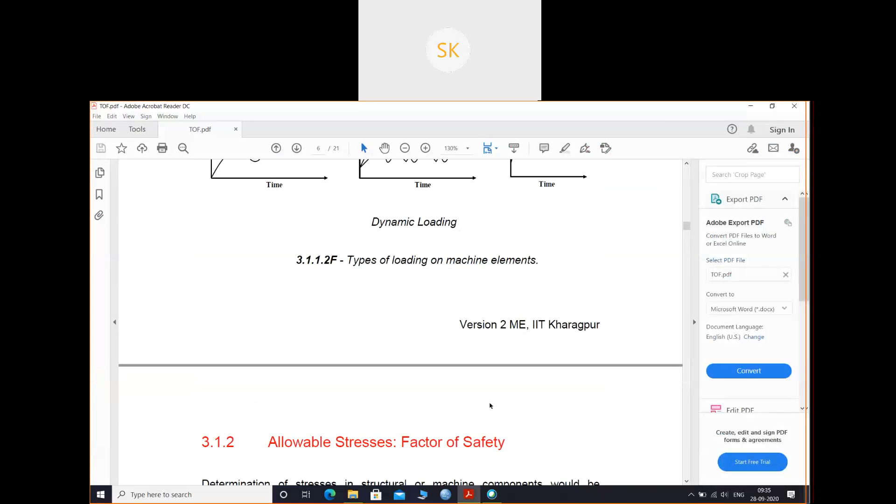So today we'll discuss theories of failure. This has two words: theories plus failure. Everyone has their own meaning of failure. If you relate it to personal life or day to day life, everyone has their own definition of failure. In terms of general things, in machines or in structures, we say a structure has failed when it breaks. So there will be two criteria for failure.

One will be yielding. When the structure yields, it tends to deform, then it gets failure. And there will be one more word, fracture. At fracture, your structure has deformed and it breaks. So this is one definition of failure.

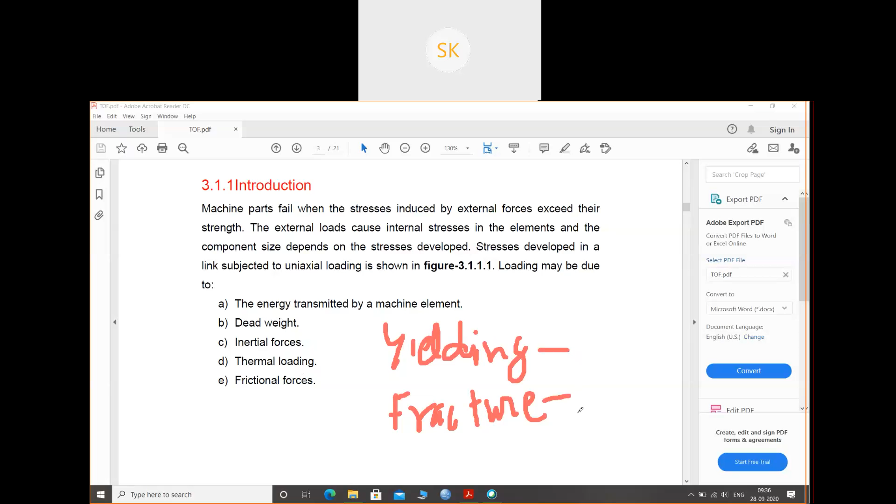So machine parts will fail when the stresses induced by external forces exceed their strength. I have discussed from the start of the class that a structure will be able to take a certain load or certain stress. When we apply a load, it will be able to take a certain amount of stress. After that, it will break, right?

So we have to design the structure in such a way that there will be two stresses. One will be allowable stress, or you can say... my voice is breaking, okay.

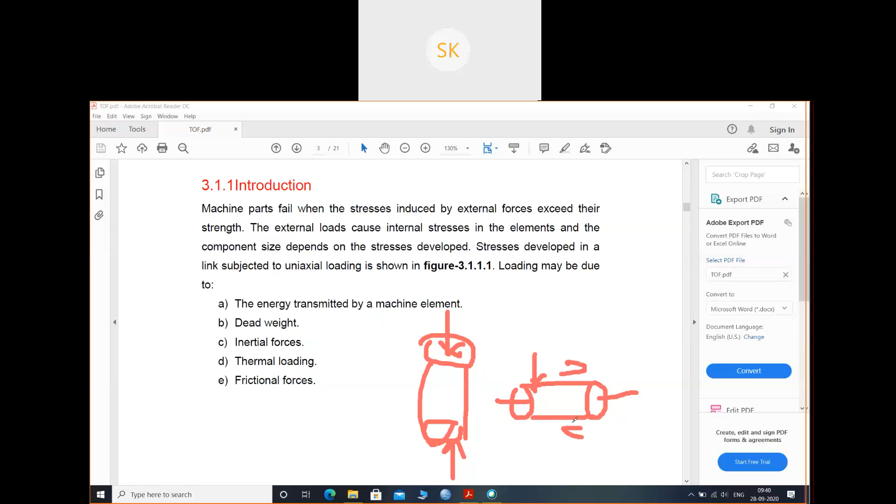This is tension, right? So uniaxial means stress only in one direction. But in general, in day to day life, a structure or machine or any component won't get only uniaxial stress, it will get many stresses from different directions, and from shear it will experience some shear stresses. But we cannot easily find the stresses on this complex body, so what we do is find the stresses treating the body as uniaxial. We relate this stress with the complex structure. The energy transmitted by a machine involves different forces acting on structures.

Before going to theory of failure, I'm starting with the basics. So this is one structure. Stress develops in a link subjected to uniaxial loading, it experiences tension, and these are the internal forces. These arrows are showing the internal forces on the member.

In another way, load may be classified as static load. Load that does not change in magnitude and direction, and normally increases gradually to a steady value. So sometimes you have static load, sometimes dynamic load. Static load means you can consider your dead load, the self weight of the structure, that is considered under static load.

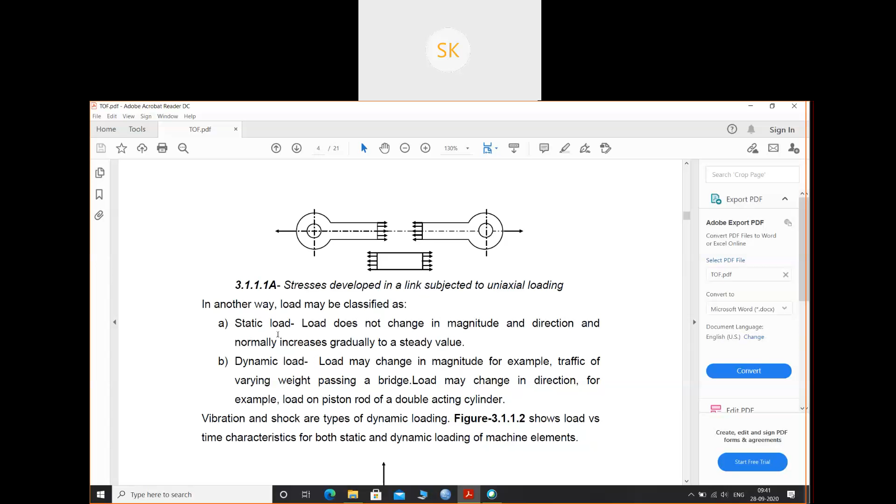Dynamic load is when load may change in magnitude, for example traffic of varying weight. Suppose you can also consider earthquake as dynamic load, or the moving of vehicles over a road, those are dynamic loads. The load is continuously changing, but in static load, the load will be similar in magnitude.

Now there is a very important point, factor of safety. You will get this word whole your life, factor of safety. Determination of stresses in structural and machine components would be meaningless unless they are compared with the material strength.

If the induced stress is less than or equal to the limiting material strength, then the design component may be considered safe. That means with the load we are giving, the stress generated from that load, if less than or equal to the limiting material strength, our component is said to be safe, and an indication about the size of the component is obtained.

The strength of various materials for engineering application is determined in the laboratory with standard specimens. For example, for tension and compression test, a round rod of specified dimension is used in a tensile test machine where load is applied until fracture occurs. This test is usually carried out in a universal testing machine, which maybe your earlier teacher in solid mechanics has already told you about.

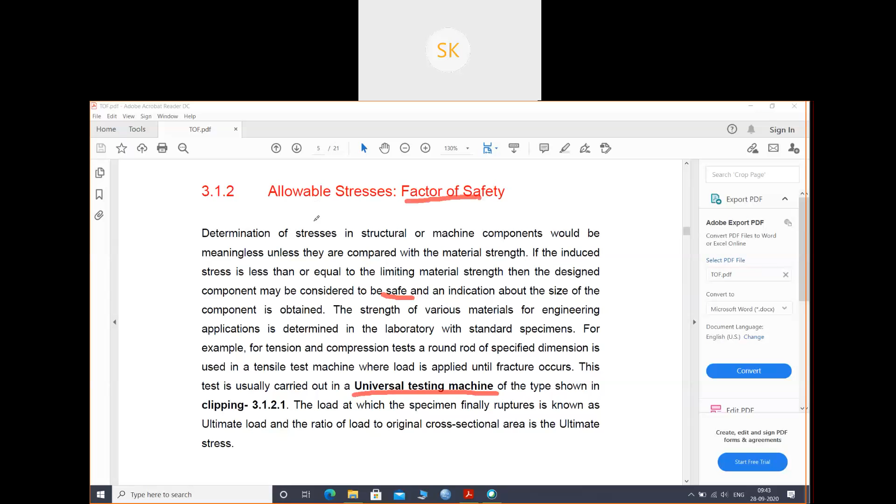That means we have to relate our material strength with the stress, and this stress should always be less than the capacity of the element. Whatever load we apply, the stress generated by that load should always be less than the material strength, that is, the load it can carry. We should not exceed this load or stress compared to the material strength, otherwise it will definitely fail.

So go through YouTube videos, you'll get a lot of videos about universal testing machines. What we do is insert a rod into the machine and try to pull it out, and at some point it gets fractured. The load at which the specimen finally ruptures or fractures is known as the ultimate load.

So as we continuously apply load, it will get yield. Suppose this is the rod, and this is the machine on one end - the machine will try to pull this rod in this direction. At some point it will fracture. So the load shown by the machine at which it gets fractured is known as the ultimate load.

That means this is the load it can carry - after this, it will fail. So the load at which your structure gets fails, that will be your ultimate load. The load at which the specimen finally ruptures is known as the ultimate load.

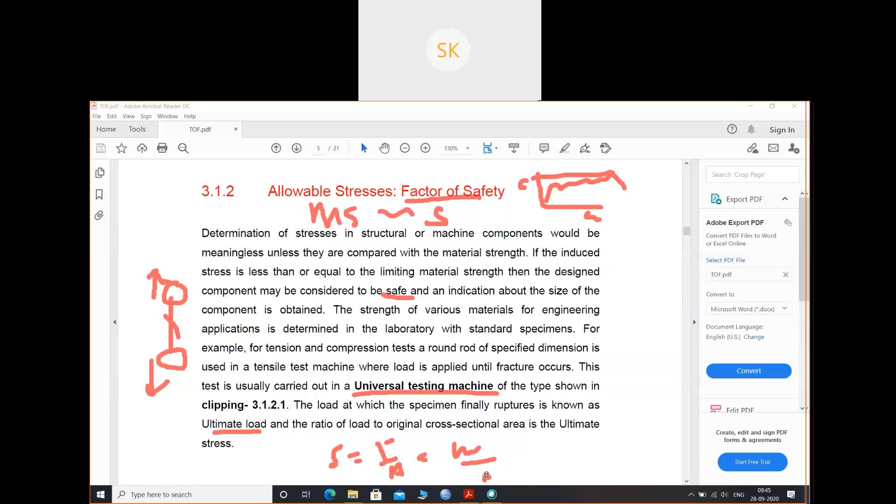And we discussed from the stress strain graph, right? We discussed from the graph that here it was the ultimate stress - this was the strain, this was the stress. So this final point of the curve is your ultimate stress. The specimen at which the structure or material finally ruptures is known as ultimate load, and that load divided by its cross sectional area gives you ultimate stress.

Similar tests are carried out for bending, shear and torsion, and the results for different materials are available in handbooks. For design purpose, an allowable stress is used in place of critical stress. So allowable stress means we can allow that much stress only. After that we cannot allow.

We will design the structure based on, we'll design the structure that at ultimate load it can carry, but normally we go for allowable stress, in place of critical stress, to take into account the uncertainty, including the following: uncertainty in loading, inhomogeneity of material, various material behavior, corrosion, plastic flow creep. Because of all these reasons, we used to take the allowable stress in our design purposes.

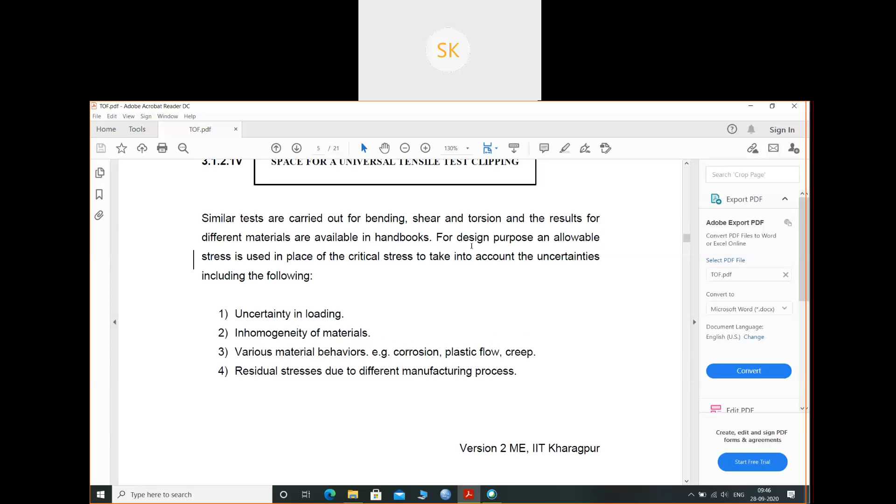So your factor of safety is the ratio of ultimate stress divided by allowable stress, and allowable stress is set considerably lower than the ultimate stress. The ratio of ultimate to allowable stress is known as factor of safety. So for ductile materials, the yield strength, and for brittle materials, the ultimate strength.

So we have two types of material in our day-to-day life. One is ductile, one is brittle means, okay, I'll come to that point. So in day to day life we have two types of material: one is ductile, one is brittle.

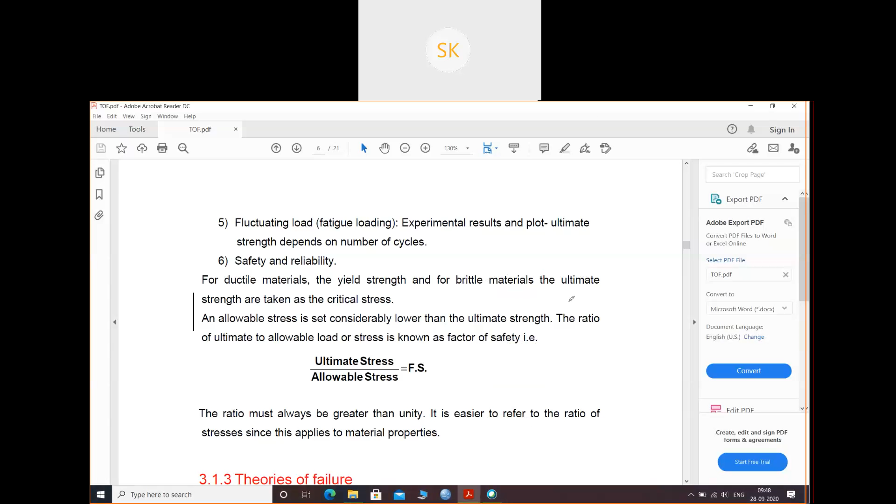Now give me an example of a ductile material and an example of a brittle material. Which material is known as ductile material, or which material we say that it is ductile, it is brittle? All of you answer in the chat box. Till you answer, let me draw a curve. Give me an example of ductile material and brittle material. Fast.

What? Aluminium and steel is what? Reply me, is it ductile or brittle material. Ductile is iron. Rubber for ductile, okay. Aluminium is ductile, glass is brittle. Stress, bricks for brittle. Good, what about others?

So go and check the ductile and brittle materials. Today just search what are ductile materials, what are brittle materials.

So for ductile materials, what is the yield strength? We take yield strength for ductile material. After yield, for ductile materials the yield strength, and for brittle materials we take ultimate strength as the critical stress. That means for ductile materials we take yield strength as the ultimate stress, the stress after which it will fail. Remember this point: for ductile material we take yield stress as the critical stress.

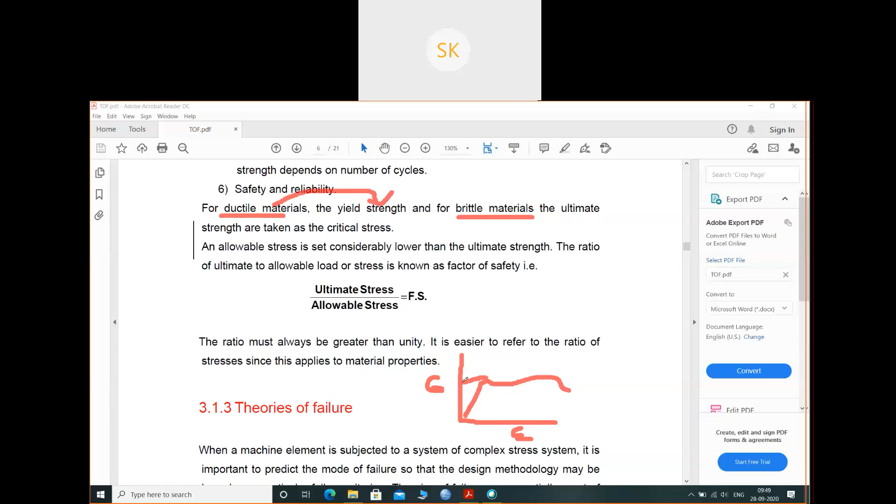That means after this stress it will get failed, that this point. And for brittle materials we'll take critical stress as ultimate strength. This part. Today go through the stress strain curve we have discussed in earlier classes. So for brittle material we take critical stress. You have understood critical stress, the stress at which your structure will fail, start rupturing, or it will start to fail.

So for brittle materials, when it reaches its ultimate strength, it will get failed. So there is a difference in critical stress for ductile materials and for brittle materials.

And the ratio of ultimate stress by allowable stress - ultimate stress is the stress at which your structure will fail, allowable stress is that at which we can allow. Generally, we can allow that if we apply a load less than this or equal to this, your structure won't fail. So your factor of safety is the ratio of ultimate stress by allowable stress. The ratio must always be greater than unity, that means greater than 1.

It is easier to refer to the ratio of stress since that applies to material properties. So if you say that you are getting a factor of safety of 2, that's better. If you say you are getting a factor of safety of 0.5, it is not better - then you need to worry about the structure. You'll get this factor of safety in your building design in earlier steps.

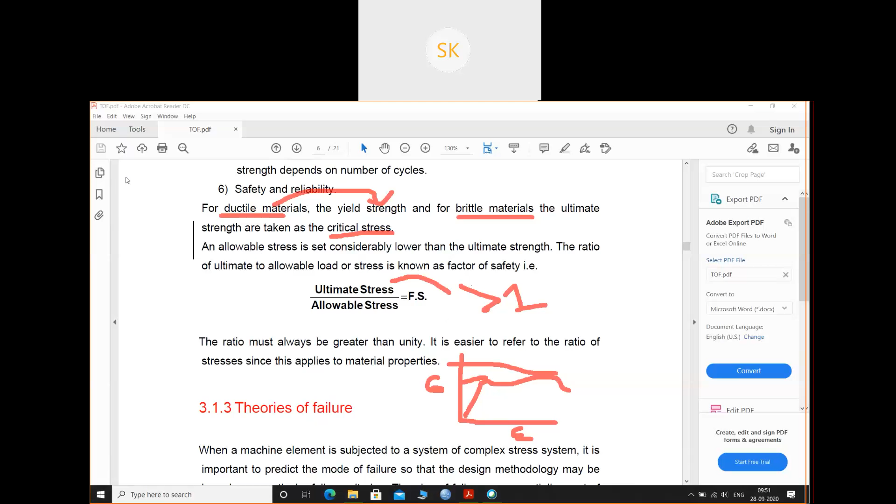So let's come to theories of failure. When a machine or element is subject to a system of complex stress - till now we discussed that your structure, suppose this cylinder, is getting uniaxial stress. Uniaxial means in one direction only, perpendicular direction. So uniaxial means only in one direction, that is perpendicular to the surface.

Now I am giving you a structure of day-to-day life. Suppose this one is a structure, or suppose consider this cylinder itself. In day-to-day life, it won't only have uniaxial stress acting on this structure. There will be some shear stress, there will be some compression. So how will you find these?

So when a machine or structure is subjected to a complex stress system, that means it is uniaxial in the form of tension, compression, plus shear stress combined. Suppose I have given a cylinder there, you are getting tensile stress, compression stress, and shear stress also simultaneously. So this is a complex stress system.

You cannot say that I am applying a load in uniaxial direction and it is getting failed by the stress generated by uniaxial load. It can fail by tension, it can fail by compression, or it can fail by shear. So it's a complex stress system.

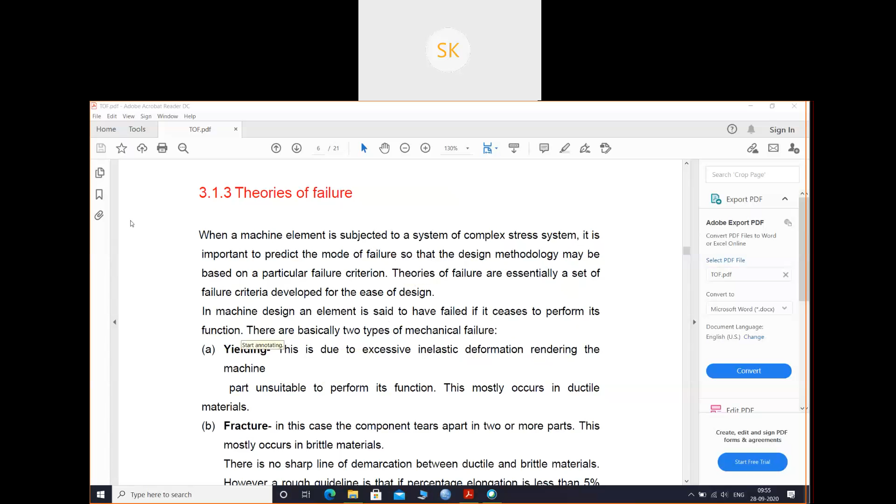In machine design, a structure is said to have failed if it ceases to perform its function, meaning it is not able to perform its function. There are two criteria of failure. One is yielding, as discussed for ductile material. This is due to excessive inelastic deformation rendering the machine part unsuitable to perform its function. This mostly occurs in ductile materials, so ductile materials get failed by yielding.

Consider this stress-strain diagram. You are applying a load. This is the elastic region, and you get a yield point, meaning the point where it starts getting deformed. After this, it won't return to its original position, meaning your elastic part is getting reduced, so you're losing the elastic part. So what happens in ductile material is that it will get failed at this point only, when it starts yielding.

But in brittle material, the component tears apart into two or more parts. This mostly occurs in brittle materials. There is no sharp line of demarcation between ductile and brittle materials. However, a rough guideline is that if percentage elongation is less than 5%, the material may be treated as brittle, and if it is more than 15%, it is treated as ductile.

So hope this yielding and fracture part is understood, that's why I started with the stress-strain curve in earlier classes. If you have understood that stress-strain part from my earlier class, you will understand this yielding and fracture part. I have discussed this there also. Still, if you have any confusion, please ask me, and I'll suggest you go over your stress-strain diagram.

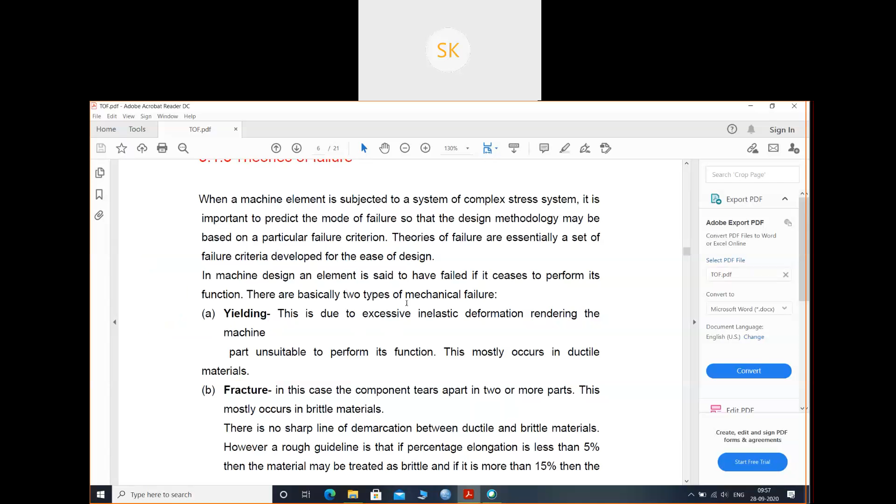You will get the yield point on that curve itself. So, one more thing: which one will be ductile and brittle?

There is no sharp line of demarcation. You cannot separate which one is ductile and brittle. Sometimes materials which are ductile in nature behave as brittle also. The rough guideline is that if the percentage elongation is less than 5%, the material may be treated as brittle, and if it is more than 15%, it will be considered ductile.

However, there are many instances when a ductile material may fail by fracture. I said ductile materials fail by yielding, but there are some exceptions, just like in chemistry there are exceptions, where it will fail by fracture. This may occur if a material is subjected to cyclic loading.

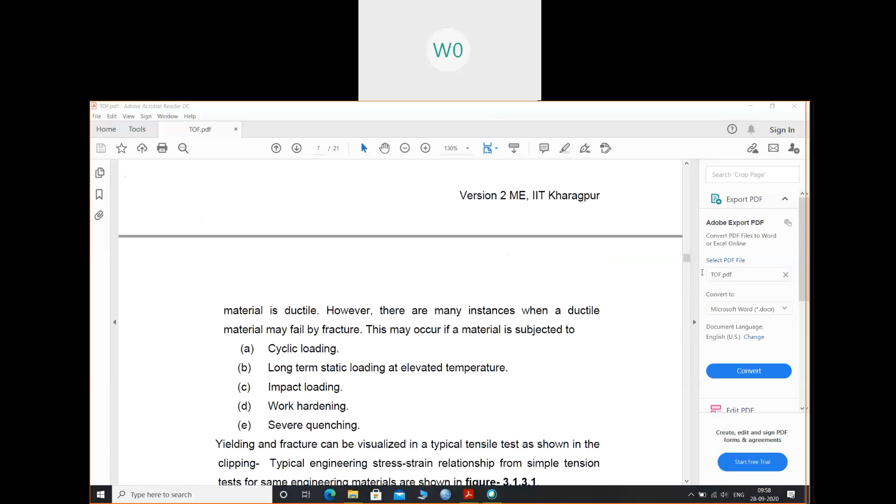Hello? Someone is speaking. Can't hear, okay. So where I left off, when it cracked and where I was not clear, please let me know.

Now my voice is clear. Am I audible? Hello? Am I audible? Please respond. My voice is okay.

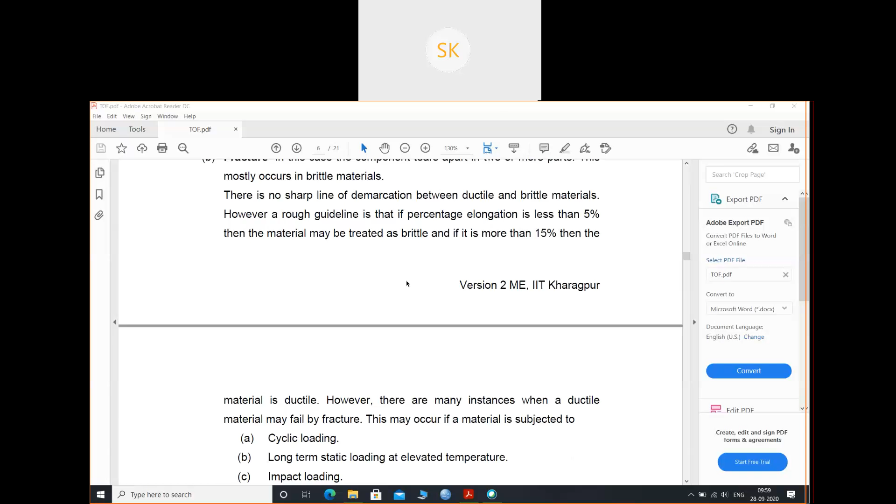Okay, so where I left off, please let me know. Have you understood the yielding and fracture part? Fracture part, okay.

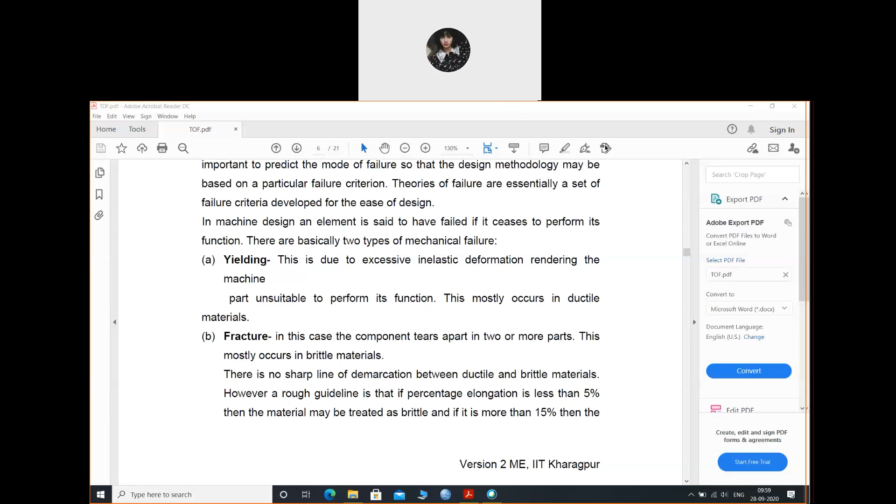Yielding point is when it starts to lose its elastic property. This is the elastic limit we discussed in the stress-strain curve. At this limit, the structure has elastic property. If you stretch it out, it will get back to its original form when you release the load. But after it reaches this yield point, it will not get back to its original shape. It will start deforming. So your ductile material fails, or the critical stress for ductile material occurs, at this point.

Now fracture. Fracture is for brittle materials. Brittle materials will pass the yielding phase, come to this phase, and at ultimate stress, at this point, it will get fractured.

And there is no sharp demarcation between ductile and brittle materials. You cannot always say definitively which material is ductile; with some materials you won't be able to distinguish. So the rough guideline is that if the percentage elongation is less than 5%, the material is treated as brittle, and if it is more than 15%, it is treated as ductile.

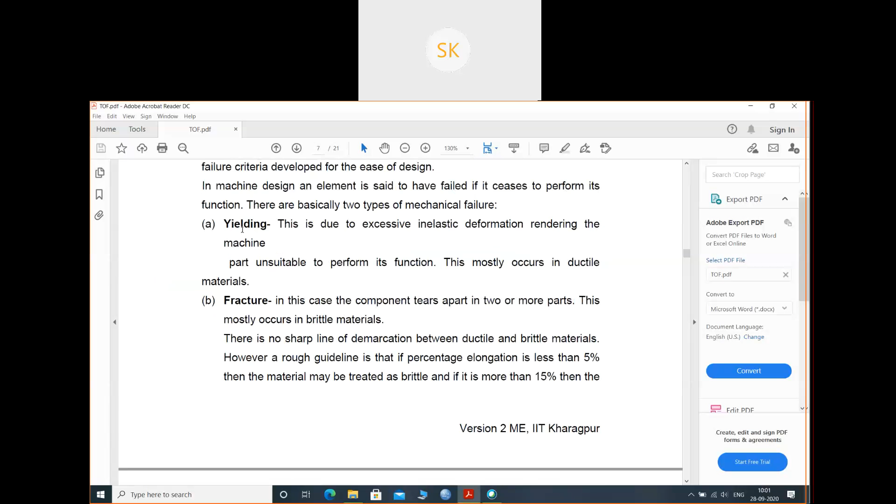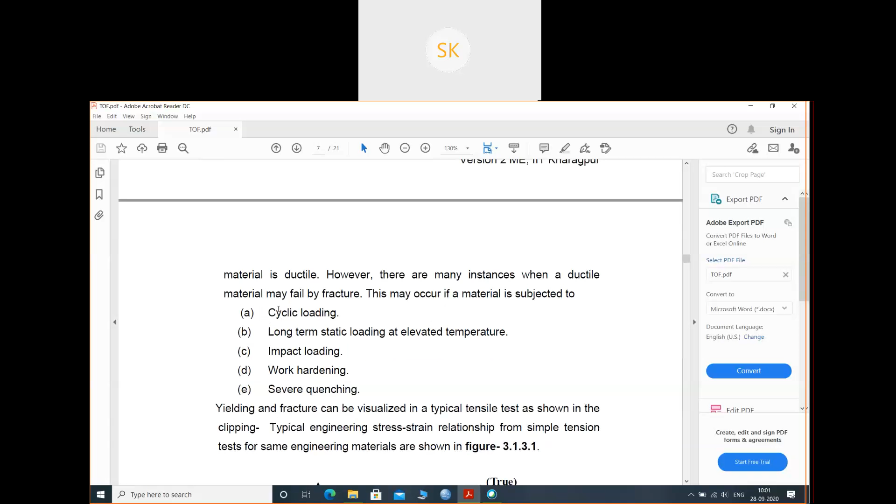However, there are many instances when a ductile material fails by fracture. Usually your ductile material fails by yielding, but there are exceptions due to cyclic loading, long-term static loading, impact loading, work hardening, severe quenching. So yielding and fracture can be visualized in a typical tensile test as shown in the figure.

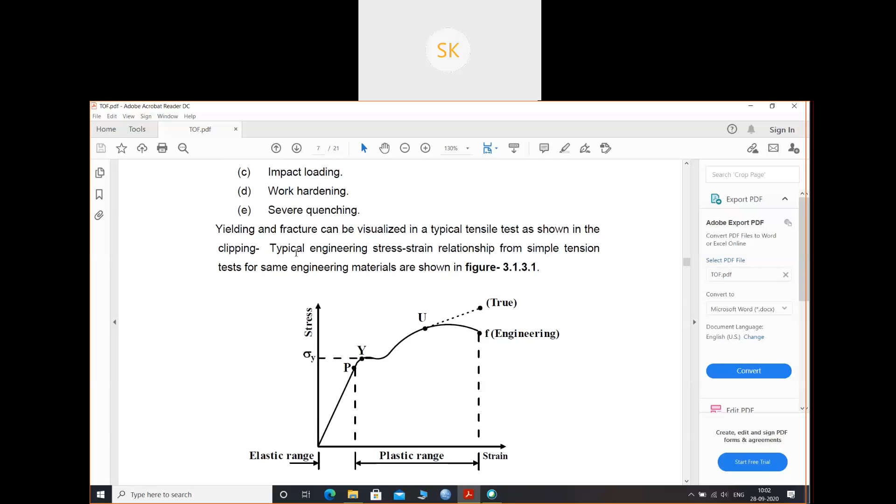So, stress-strain diagram for a ductile material, example low carbon steel. This is the stress-strain diagram. This part is the elastic range, meaning if you release the load here, it will get back to its original position. Now till point P, your structure is in the elastic region.

Now as you apply more load, it reaches point Y. So sigma Y is your yielding stress. Then as you continue loading, this is U, your ultimate strength. This is for brittle material. At this point it will get fractured. So this is your sigma U, and this is your sigma Y.

So basically, let me note. For safe condition for ductile material, your stress applied should be less than or equal to sigma y. For the safe condition of a structure which is ductile in nature, your applied stress, sigma, should be less than sigma y.

And for brittle material, the safe condition will be your stress should be less than or equal to sigma u. I am representing sigma u as the ultimate stress.

So for ductile material, your safe condition: the structure will be safe if the stress applied is less than or equal to sigma y, which is the yielding stress. For brittle material, your sigma should be less than or equal to sigma u, the ultimate stress. If this value exceeds, your structure will fail. In ductile cases, if this value increases beyond sigma y, it will fail at that point. So that is the difference between ductile and brittle material.

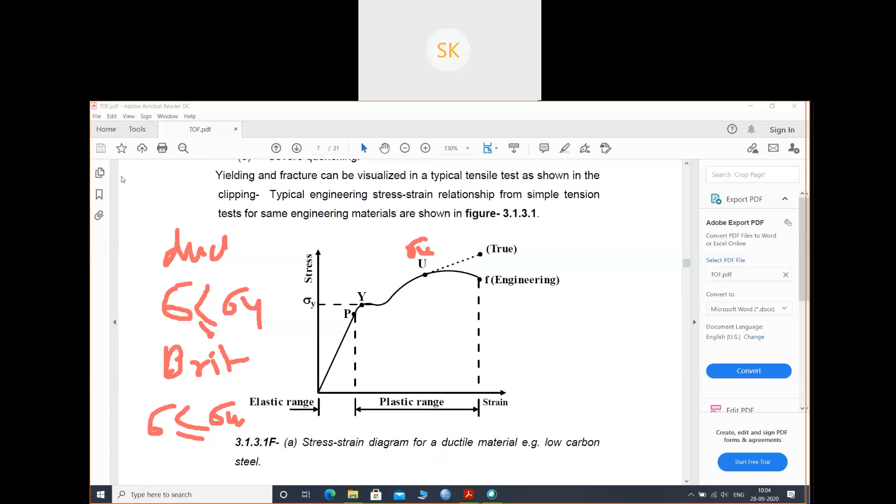0.2% offset - what was this term referred to? What was the term for this 0.2% offset value? Anyone remember? We have discussed our term for this value. 33 students are there, anyone know this value? What does 0.2% offset mean? Why do we take this 0.2% offset? Just the word itself will be enough if you know this.

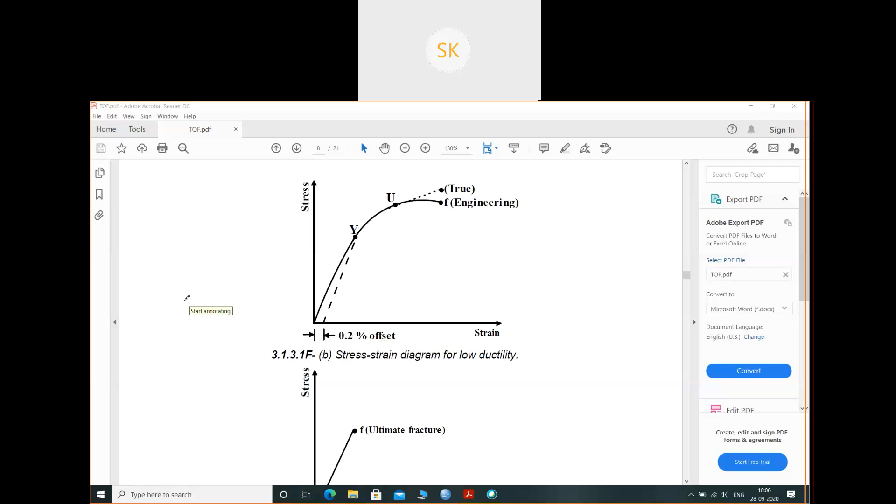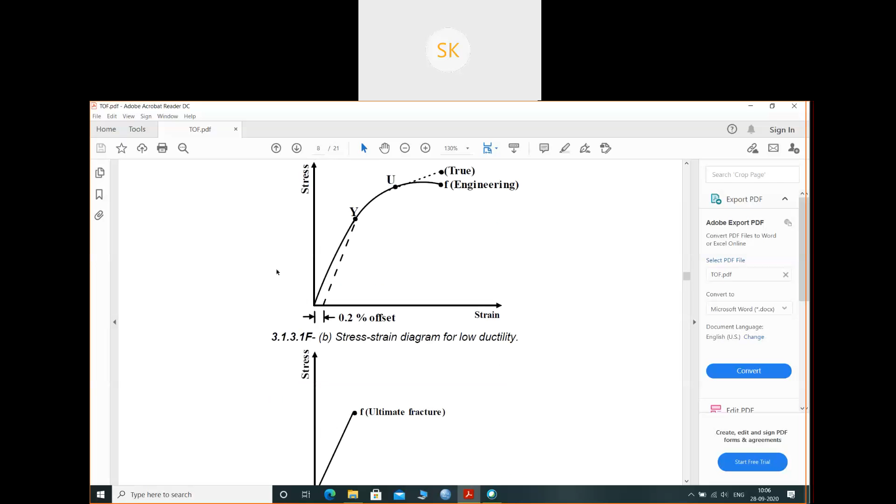Yielding stress. Anyone? Only one student replied. What about others?

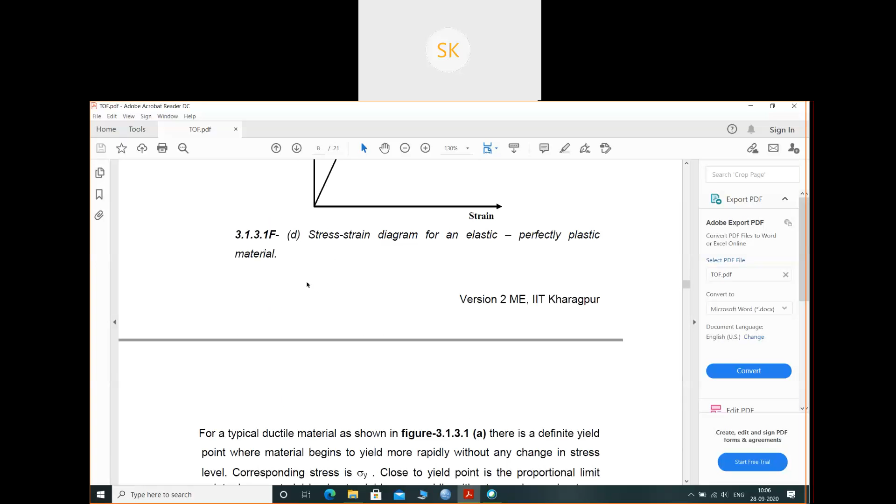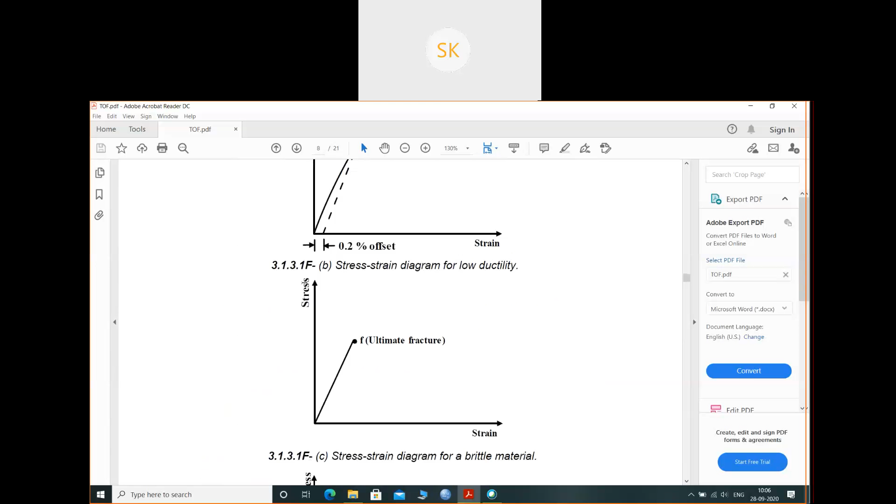Okay, go and see your notes if you have made notes. So let's move on. Yielding strength - there is a written offset, so it was related to some offset.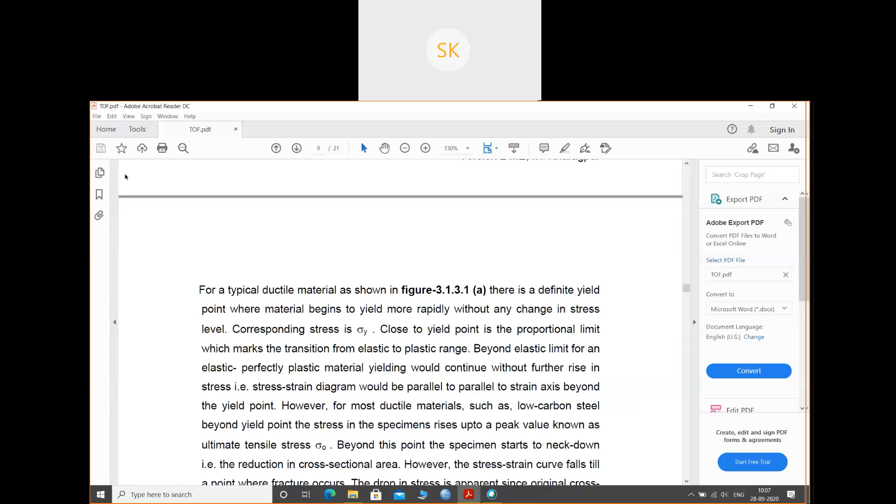For a typical ductile material, as shown in the stress strain diagram, there is a definite yield point where the material begins to yield more rapidly without any change in stress level. The corresponding stress is sigma y. Close to the yield point is the proportional limit, which marks the transition from elastic to plastic range. Beyond the elastic limit, for a perfectly plastic material, yielding would continue without further rise in stress - that is, the stress strain diagram would be parallel to the strain axis. You just study this, I have discussed it in the figure itself.

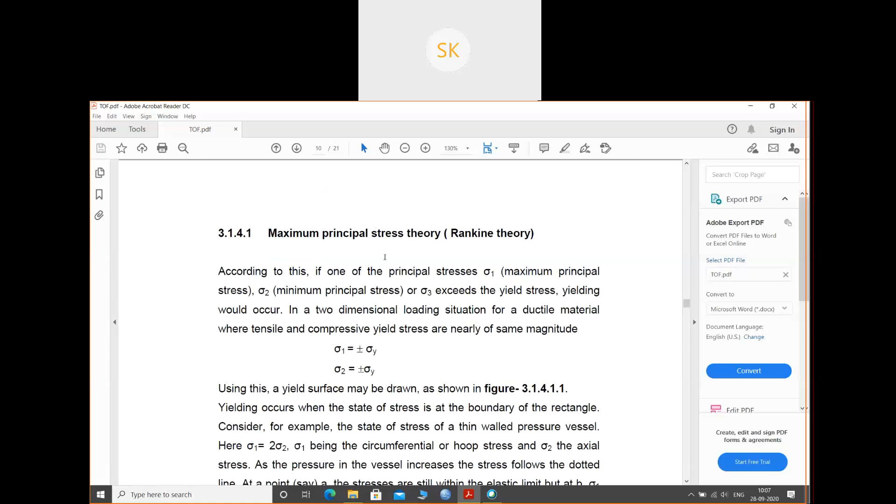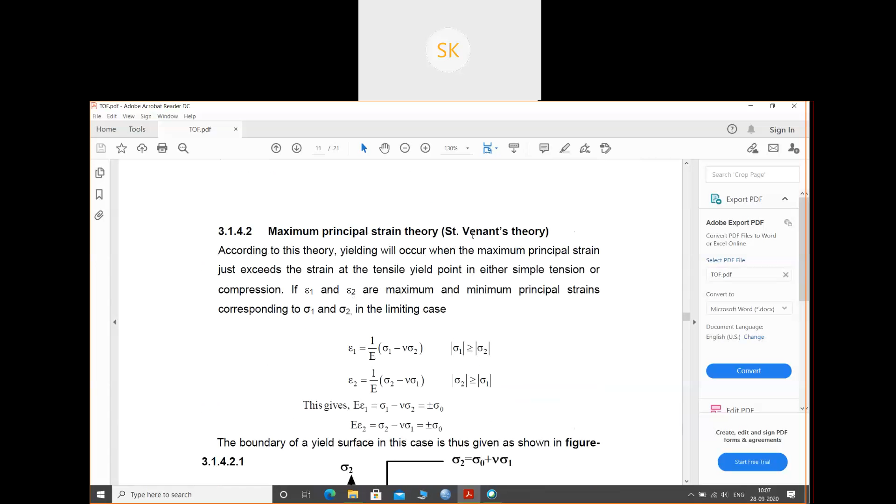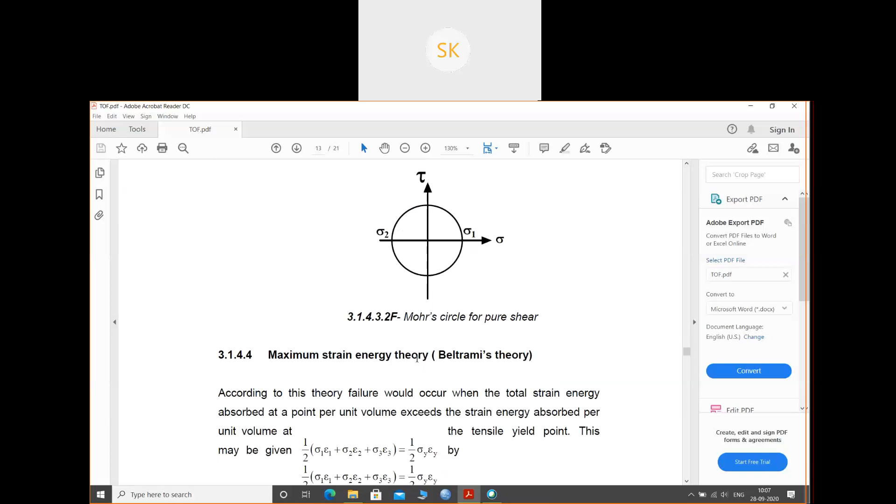Now these are the theories given by the scientists. There are different theories: maximum principal stress theory, also termed Rankine theory because Rankine gave this theory. Then maximum principal strain theory, also called Saint Venant's theory. Then maximum shear stress theory, Tresca theory, and maximum strain energy theory, Beltrami's theory.

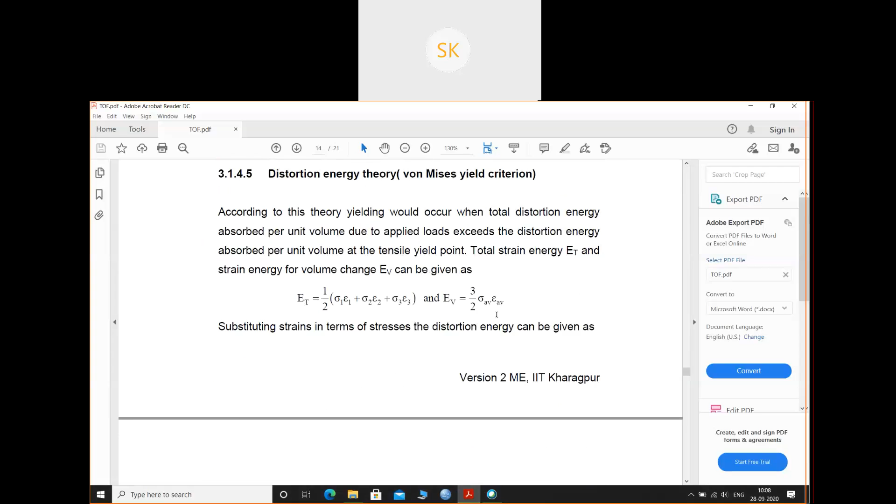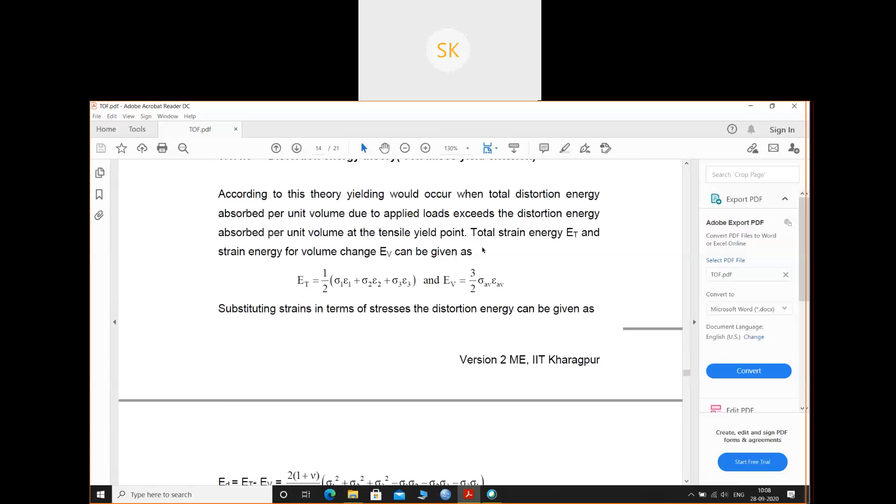We'll study all these theories in the next class. Then we have distortion energy theory, also known as von Mises criteria. How many theories do we have? So total 5 theories we have, which we'll discuss in the next class.

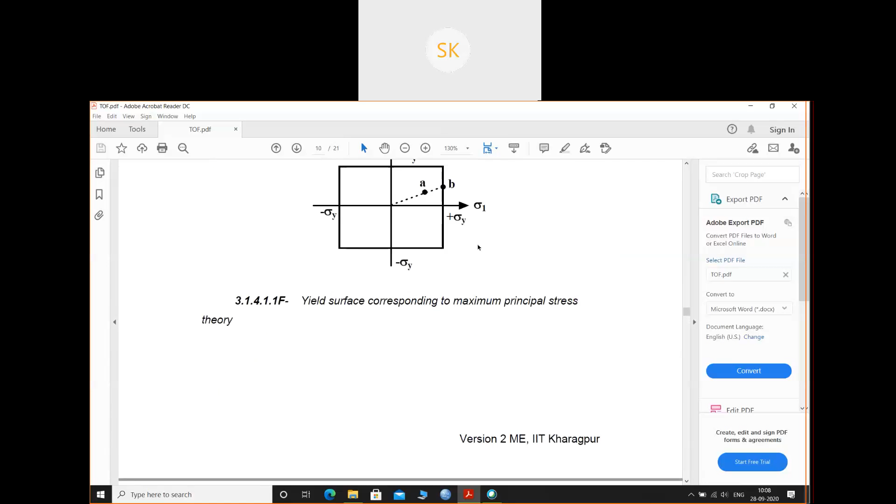These theories basically depict the failure criteria on a structure. According to each theory, they have given some conditions - if this happens, this is the reason for the failure. Another theory says if this increases, that is the reason for failure. So like everyone has their own opinion of failure or success, these scientists have given their own theories for failure - just like in your science class with the Rutherford experiment, Bohr model, Pauli's exclusion principle - all about the structure of the atom. They gave different theories. Similarly, for why a structure fails, they have given different failure theories.

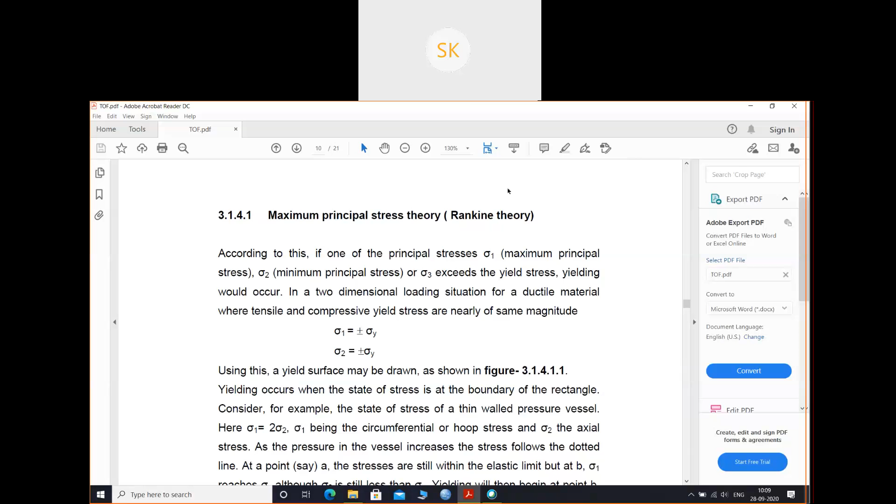Okay, so we'll study this in the next class.